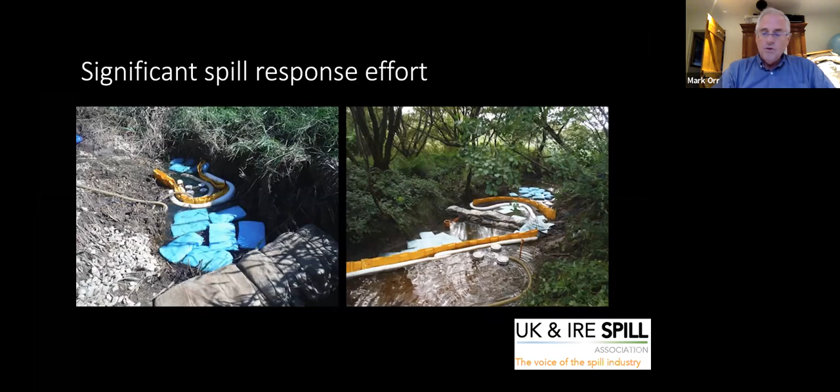There's also been quite extensive collection of product from local streams and ditches as it has been washed out of the ballast and out of the siding into the surrounding area. These are some pictures of what's been done, including this bubble boom, which has been used—several bubble booms—as they help in collecting the product from the streams and ditches.

Work is likely to continue for some time, and the rail infrastructure has yet to be reinstated, though the line has been reopened.

Now, obviously, in any derailment, the Rail Accident Investigation Branch are involved, and their preliminary examination has found that although the wheels of the train were probably rotating freely when the train left Milford Haven, at some point during the journey the brakes on all wheels of the 3rd wagon had become applied and remained so until the derailment. The lead axle ceased to rotate altogether.

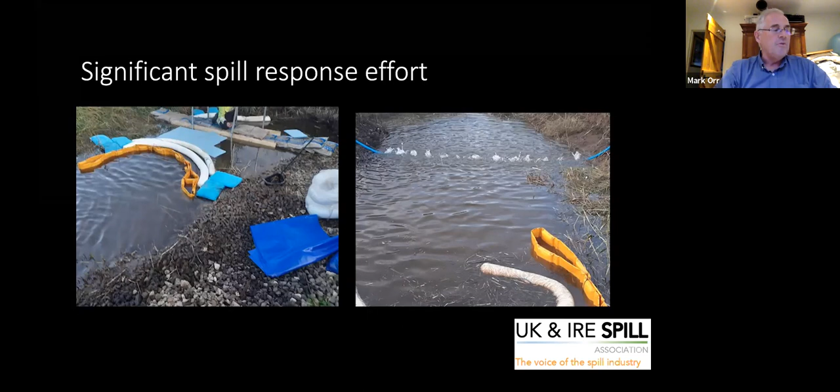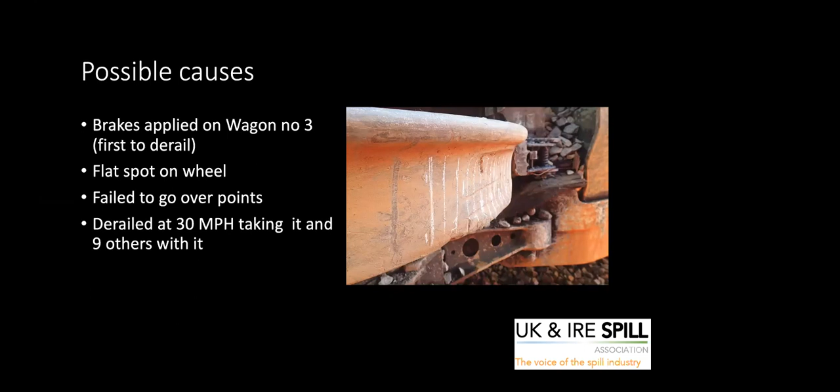This is on wagon number 3, and consequently a flat spot of around 230 millimetres long developed, as you can see in this picture. This 230 millimetre long flat spot developed on each side of the wheels on this axle. There was a substantial false flange, in other words a raised lip on the outer side of the wheel tread, associated with these flat spots, which you can see quite clearly in this picture.

So when the train reached the crossover at Morlais Junction, travelling at about 30 miles per hour, 48 kilometres an hour, the false flange on the right-hand wheel caught on the converging stock rail and distorted the track, which then led to the derailment of both wheels.

Around 100 metres further on, the partially derailed wagon encountered facing points set to route the train to the right. The locomotive and the two leading wagons went to the right, and the derailed third wagon went straight ahead, turning over on its right-hand side and becoming detached from the wagon in front of it. This caused the points and the track beyond them to be destroyed, and the derailment of another 9 wagons followed.

Once it had broken the connection with the wagons in front of it, those wagons came to a stop some 180 metres away from the third wagon. And when the 12th wagon had derailed, it broke its connection, which applied the brakes to the wagons behind it.

So obviously the Rail Accident Investigation Branch have issued preliminary findings. It's quite hard now to get detailed information about the spillage and its consequences. Presumably, because it's such a large spill, there's an equally large bill to be paid, and whoever is being found responsible, there's a bit of a lockdown on information coming from it.

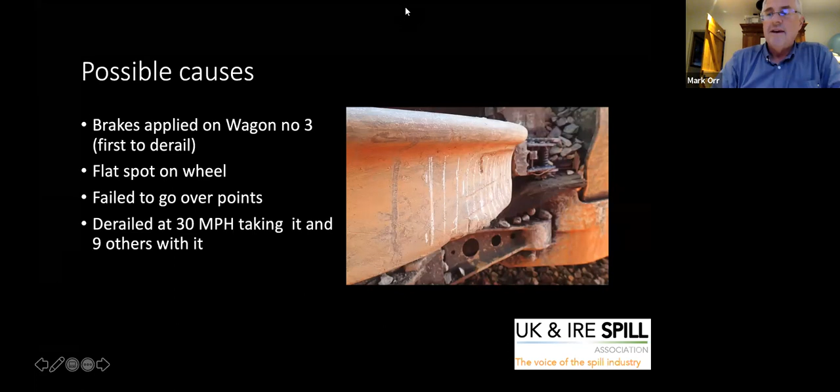Thank you, Mark. Can you just allow me to share my screen, please? Oh yeah, of course, yeah. Thank you. Okay, that should be enabled now. Brilliant. Can you see that? Yeah, and if you just go slideshow. There we are. Great. Lovely.

Thank you very much, and thank you for the introduction, and thank you for the opportunity to speak today and be part of the UK and Ireland Spill Association webinar. For those of you who don't know me, I was appointed to the board of the association a few weeks ago to represent the Inland Spill and Consultancy position. I thought it would be a good idea to use today to explain maybe how the consultancy part of the role can become such a big part of a spill cleanup.

Now, this is only a short presentation, but I thought a quick summary about the background of technical specialists would be useful, followed by a bit more information about different spills, and then go straight into a case study that shows the type of incidents that are becoming much more common for us, RSK Raw.

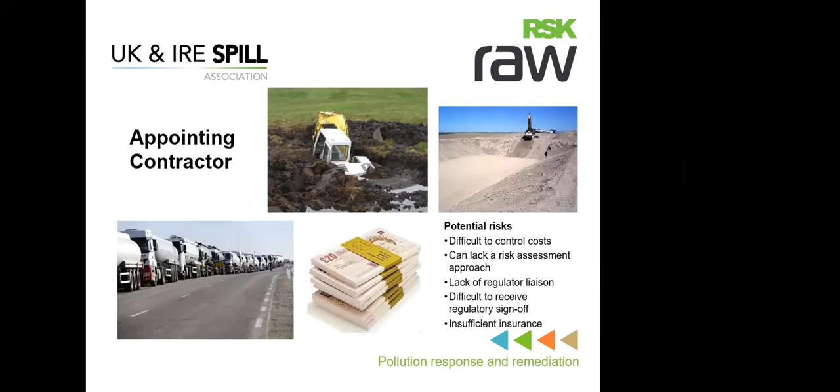The alternative was to appoint a consultant, but the average factory operator at the time would believe all they get is lengthy reports and very little action. This has led to the rise of technical specialists that combine the best parts of the contractor and consultant to produce a product more worthwhile to the client.

Many of these technical specialists, RSK Raw included, could provide a response to small spills such as heating oil and onto larger commercial incidents. The approach to contamination has become more technical through the years, and the services have been developed to provide a wider range of products to clients.

However, I don't think industry has been particularly good at explaining how complicated some of the work is, and in some areas this has resulted in the work being commoditized and undervalued. We're frequently contacted, and it's assumed all we do is place booms across watercourses and place absorbents down. We're constantly asked to provide proposals for oil spills, as if that's the only thing a company is likely to spill.

There needs to be a reality check.

We all know that oils generally exhibit non-polar properties and don't mix well with water, but it's often forgotten that other potential pollutants such as herbicides and milk exhibit polar properties and will mix well with water, whether by solubility, suspension, or colloidal liquids. These pollutants cannot be cleaned up using booms and absorbents, and it's essential that we and our clients understand the properties of these pollutants.

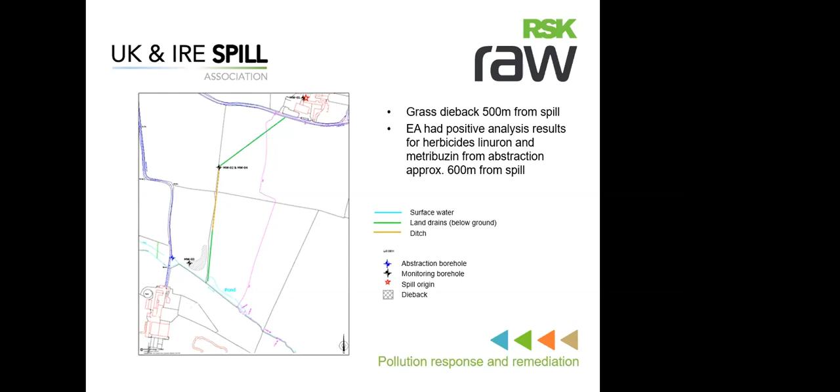The farmer provided information on the contents of the sprayer after the unfortunate incident resulting in its rollover.

This indicated that the sprayer contained a mixture of prosulfocarb, an emulsifiable concentrate, metribuzin, held in a colloidal suspension, and linuron, which would have been crystals with a slight solubility held in suspension.

The contents of the sprayer did appear to contain similar herbicides to those found in the abstraction boreholes, some 600 metres from the spill origin.

It's worth noting on this plan the land drains and an open ditch that flows southerly from the spill origin.

The second stretch of land drain was noted to be in close proximity to the area of dieback, and therefore it was possible that this was related to the spill.

Research had already shown that the abstraction boreholes were pumping from a deeper aquifer, and therefore the linkage had not been identified.

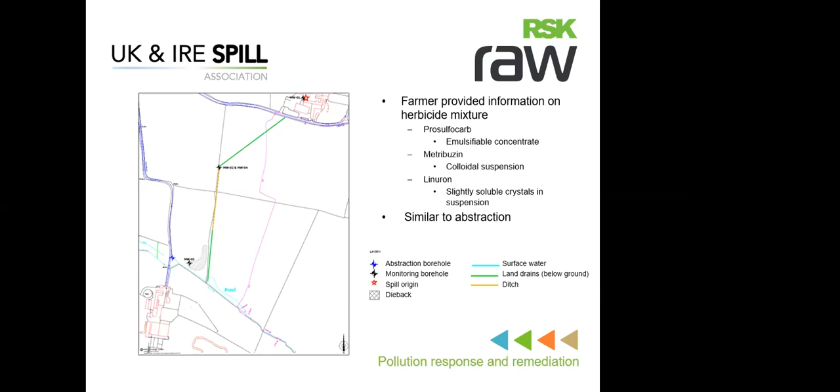Response. Clearly, given the type of pollutant, traditional spill response equipment such as booms and absorbents were not going to work. However, the first mitigation measures required the area of the yard where the spillage occurred to be excavated.

You can never quite get away from excavation. The material in this area was saturated, and it was essential to remove it as soon as possible.

The worst of the material was limited to an isolated area, as you can see in some of the photos there.

It was likely this saturated material was leaching into the drainage system around the yard, and consequently, it was essential to gain an understanding of the drainage.

If possible, it was necessary to stop the contaminated water leaving site and identify where it could be recovered through pumping. The ground investigation then needed to be split into two parts.

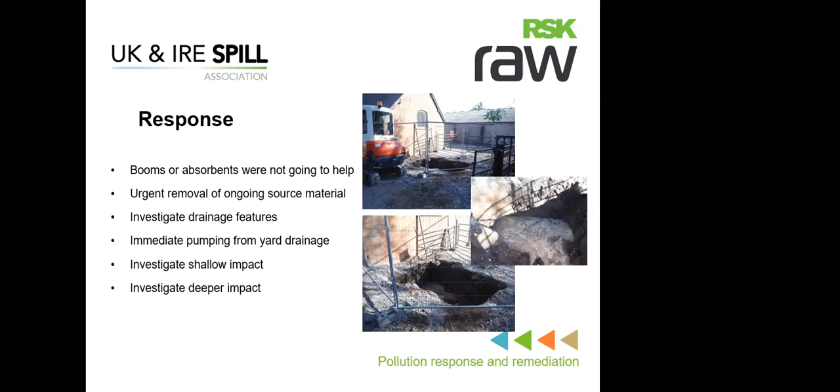One for the shallow materials, generally in the vicinity of the farmyard, and the other for the deeper investigation of the principal aquifer, to both investigate the extent of contamination and gain an understanding on how the contamination has migrated into the aquifer.

The investigation progressed at different times over a long period as understanding of the pathways and migration of the pollutant developed. For a relatively low volume of herbicide lost, there was extensive contamination of the shallow materials beneath the yard. This was finding its way into the drainage system and migrating rapidly away from the yard in a southerly direction. Both the land, the drainage, and groundwater had a gradient down to the south.

The drainage in the area drained through a series of land drains and ditches to a pond approximately 600 meters to the south of the spill site.

On analysis of the water samples, the deeper boreholes confirmed the presence of herbicide contamination in the principal aquifer, similar in type to that found in the shallow water at the spill origin.

All the drilling work had to be undertaken with great care. For the shallow investigation, it was important not to investigate too deep and risk penetrating the principal aquifer. Similarly, when investigating the deeper principal aquifer, it was essential not to introduce a contaminant preferential pathway and risk causing a further pollution incident. Given the risk to the aquifer and from hazardous herbicide compounds, all the work came under the scrutiny of the Environment Agency.

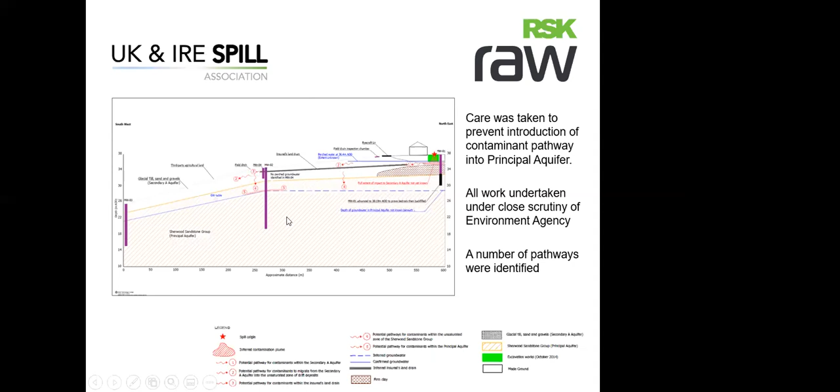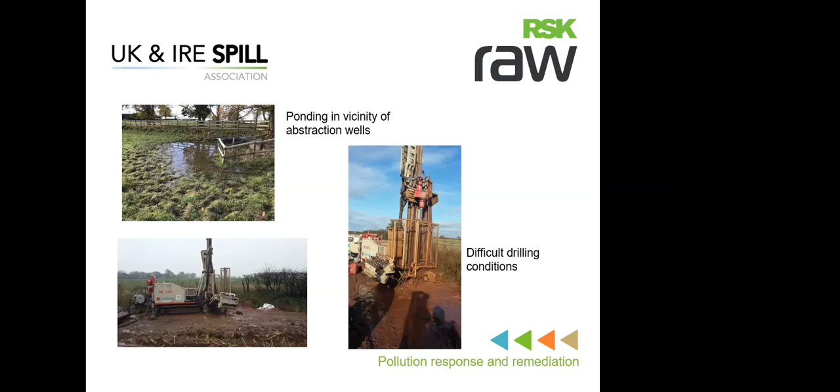Drilling works were carried out by Geocore, who have now just joined us at RSK to help boost our capabilities.

Again, more photos of the challenging access conditions and the extensive drilling work required for the monitoring. It's worth stating again that the Environment Agency were taking this incident very seriously and were looking for a very detailed understanding of our conceptual site model.

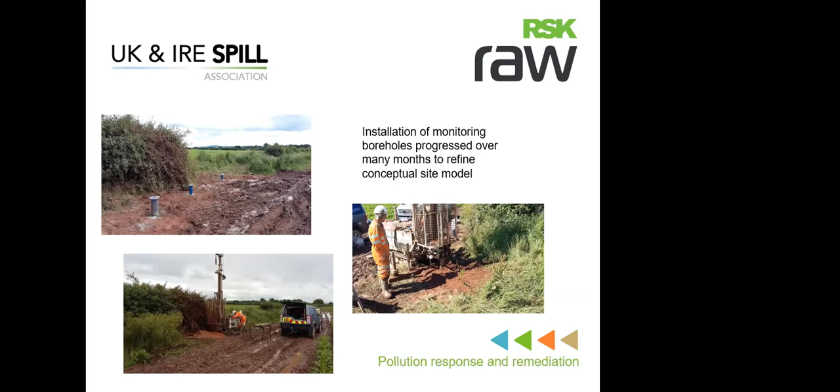As seen earlier, it was known that we needed to remove the material at the spill origin. The ground around the spill was also contaminated with herbicide, but it would have been impractical to remove everything. Therefore, interception recovery trenches were proposed. The old drainage needed to be flushed to remove the herbicide and the effluent recovered. Although initially removing the effluent by tanker reduced the risk, it was necessary for the effluent from the drains and recovery trenches to be treated to reduce the cost of disposal.

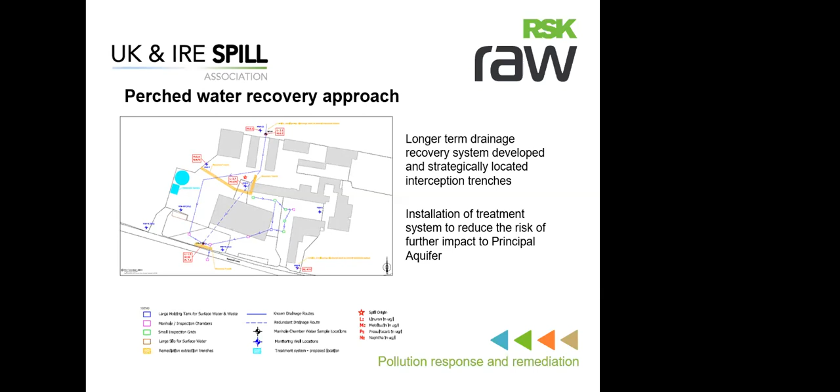Submersible pumps with float switches were used in both the trenches and drainage chambers to ensure the system could run with minimal contact over an extended period. The flow information was also important so that an adequate treatment system could be designed and operated without the risk of further pollution incidents as a result of insufficient capacity.

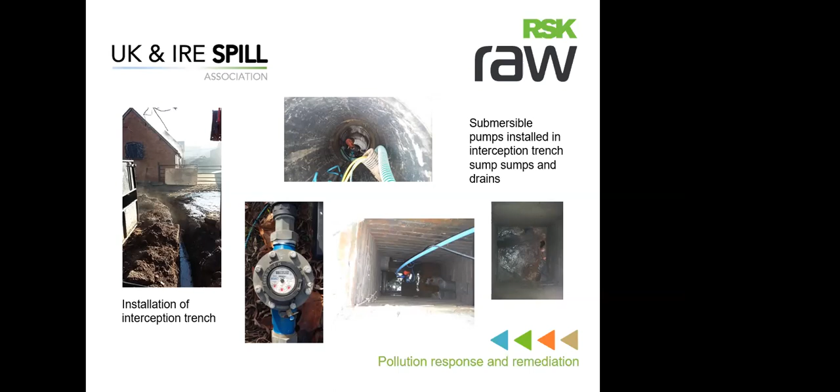As discussed previously, a solution was required for the large volume of water and herbicide that was pumped from the drainage and shallow ground. In the early stages, we made use of rapidly deployed fast tanks before moving on to permanent tanks. It was essential to have sufficient storage of pumped water so as not to overload the treatment system, which required specific flow rates.

The water flowed through a series of treatment processes to reduce the herbicide concentration and was then stored again and analysed to confirm the success of the system.

Following a trial period, it was agreed with the Environment Agency, due to the success of the system, that the water could be used by the farm for irrigation. This proved to be a very cost-effective solution for reuse of the treated water. The system was finally decommissioned in 2018.

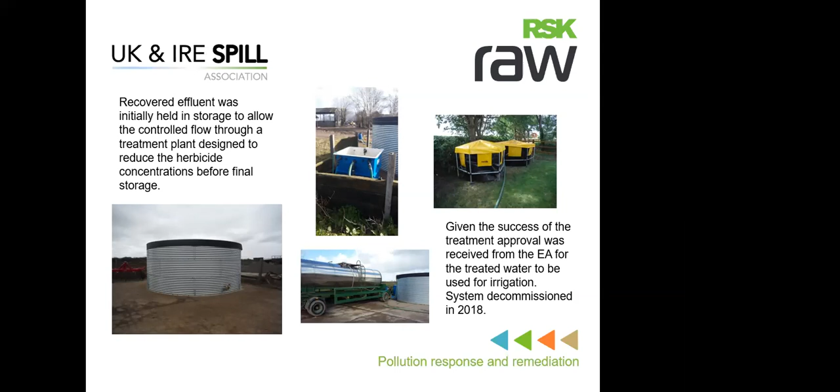After much sampling, testing and monitoring of the principal aquifer, there remained herbicide concentrations in excess of the UK drinking water standards. Obviously, this was not acceptable to the Environment Agency.

A detailed quantitative risk assessment was essential, and given the extent of contamination, additional investigation was required to ensure the DQRA had the appropriate information. To try and bring closure to the investigation, the scope was prior agreed with the Environment Agency.

In agreement with the EA, further boreholes were drilled to further refine the extent of the contamination and to monitor its movement. We analysed the data over a period of time to confirm the flow direction of groundwater and to monitor the attenuation of the contaminants. This additional site-specific data was absolutely essential for the DQRA.

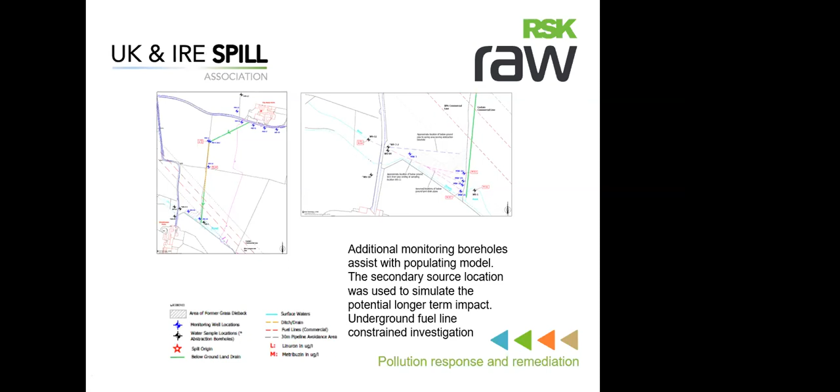A conservative model was adopted, as that was considered the most likely to be accepted by the Environment Agency. Prosulfocarb was no longer a consideration, as that was not identified in the water samples. Linuron was also shown to attenuate after a controlled distance to below the UK drinking water standards. Unfortunately, metribuzin modelling showed it would remain above the UK drinking water standard.

Consequently, additional research was undertaken into metribuzin and specific health criteria values proposed. The modelled attenuated values were below these new criteria values. This modelling was subsequently issued to the Environment Agency for review.

In respect of further remediation of the principal aquifer, the agency agreed there was little benefit in continuing. It should be noted that this small, simple spill of 1,000 litres has impacted on the viability of the aquifer as a resource, and a record is maintained by the agency should they receive future inquiries for abstractions.